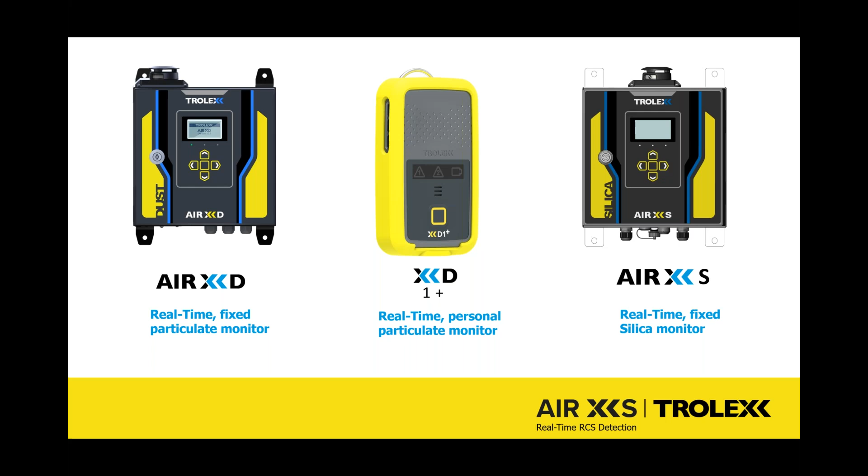So its basic design principle is to give real-time, instantaneous information. So whereas air sampling can be done for legislative purposes, this can give additional information so you can act upon that straight away. We can have short time periods, like from a minute. So if you were looking at a process and you really wanted to drill down into what was causing the peak of that dust, you can have the rolling average on a minute, so you can see the real live data.

We've been doing quite a lot of focus on kitchen worktop manufacturing, kitchen countertop, benchtop, depending on the local name for them. And in fact, Dawn was out last week with our hygienist at a site, and they were looking at doing some different types of cuts and how much dust they generated using different saws. And having the data available on that 1 minute period could really help with how they utilize them, how the extraction was working, and also then to look at how to improve the extraction to give greater protection.

We can also do 15 minutes, 1 hour, 4 hour, or 8 hours, so you can look at a typical operator's rolling average throughout the day. The unit can display the warnings on the device, so you can set, for example, 0.05, so the US Silica level, if my memory is correct. Or you can do it at half that, you can do it at a fifth that. The unit's very, very sensitive, so you can set the alarms of what it can do.

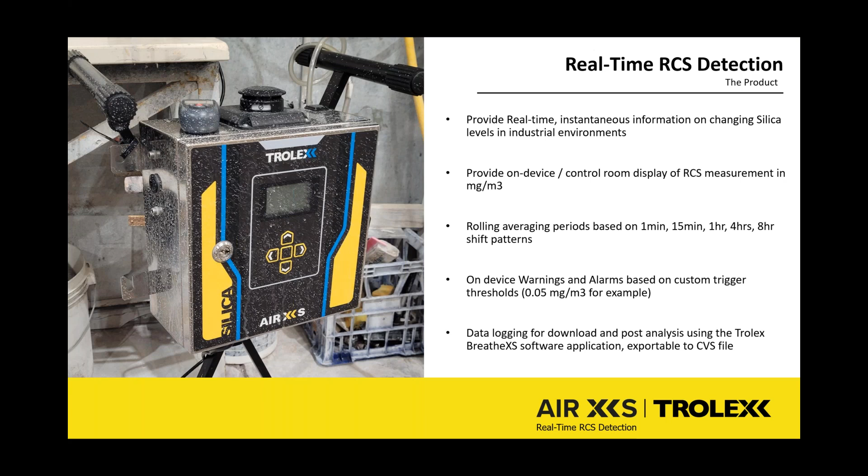So how does it work? So if you think of the top of the unit, that's what the unit looks like. So it's about a foot square, its footprint on there. So the air goes through from the top into the laser, and this is a sensor here. So let's just see if I can share my webcam, 1 second.

So this is a typical sensor in our small portable monitors. This counts dust by size. So that's the sort of scale of it, just so you can see next to my iPhone. I'm going the wrong way. There we are. Can't work in reverse.

So if we then look at the size of the sensor in the AirXS, this is the size of the sensor. So there's a lot more going on with it compared to a normal particulate monitor, and there's a lot more workings on here. You can see these steel rods holding all the different lenses in pure alignment, and a lot more processing power going on with the unit. This is what makes it a lot different.

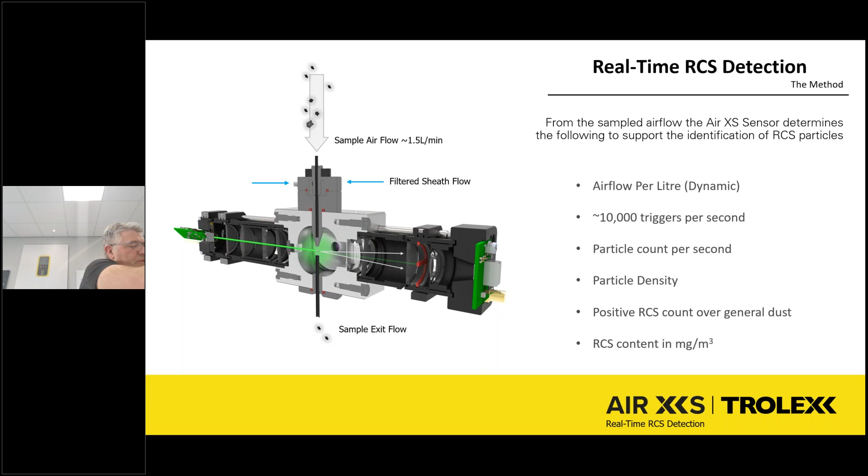So going back to the schematic here, the air is going to come through the top. We have a filtered sheath flow, which I'll come on to in a minute. It then goes in to be analyzed by the laser. So we've got a very, very focused point, and then we're looking at different readings coming off of this. And I'll go through that in a second. You see there, it can do 10,000 triggers per second.

So if you think of a heavy dust environment, whether this be construction where somebody's cutting some concrete with a saw, we've all probably driven past roadwork contractors where they have the Stihl saws brand in the UK, but it's just a concrete cutting saw. Typically they have no protection, and they're doing a grimace as they cut away, and they're covered in a cloud of dust. So when you think about the AirXS monitor, this can cope with 10,000 counts per second. So it's going to give you lots of information.

So it's looking at particle count. We know the density of respirable crystalline silica. It can ignore the generic dust, and it's just going to focus on the respirable crystalline silica dust. And then the data it's going to push out at the end is going to be the respirable crystalline silica content in milligrams per meter cubed. So we can see that for comparison between occupational levels, comparison to what the level is typically, comparison to what the level is that you're aiming for as a business or as a hygienist working within a business.

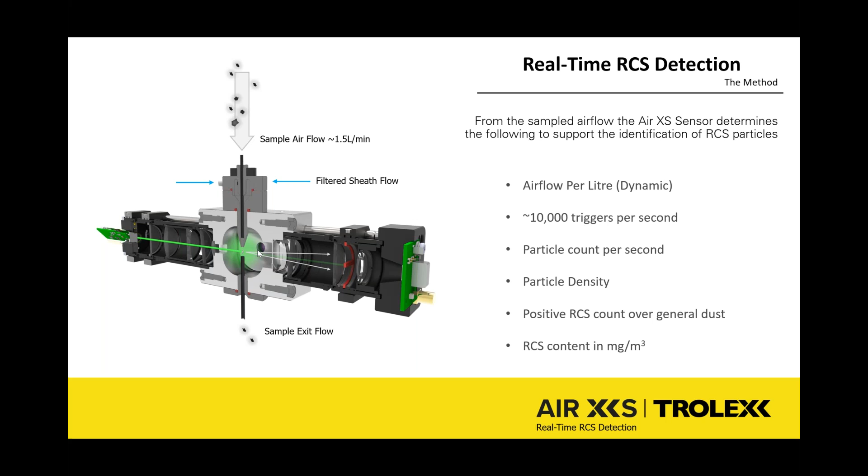So the air is going to come through and out there. You can see there's a filter here. We have one filter and another one just to the side. I'll show you a unit towards the end of the presentation. One filter is cleaning the air before it goes into the pump. We do this because dust particles inside a pump will cause damage and give it a short life.

And then the second filter, once we've counted the air, any particulate contamination is captured on that filter. So we're not counting any dangerous respirable crystalline silica in our monitor and allowing it to go back into the air to be breathed in. We actually capture it in the filter as well.

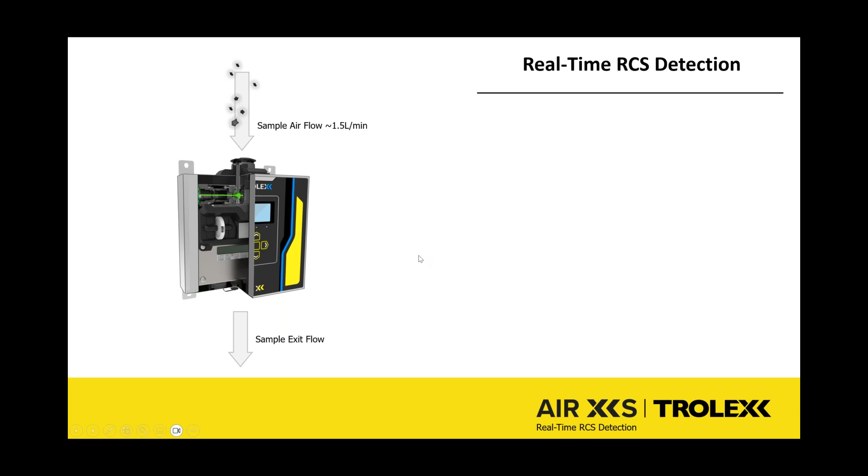So we're not allowing that particular bit of the air to go and harm somebody's lungs. So this is how it works.

If you think of what I said about our standard small particulate monitor, that would normally just have a light source and a receiver. What we're doing with the AirXS sensor, we're looking at counting the particles by size. We know the density, but then we're going to use something called optical refraction. So what you can see around here, this is very different to any other particle counter. Respirable crystalline silica has a signature pattern.

And by looking at the light refraction from it, measuring the light absorption, we then couple that with a particle size and the wavelength of what we send the laser out, we can calculate with these signatures the respirable crystalline silica content in milligrams meter cubed. If you remember what I said before, it can do 10,000 counts per second. So when you're thinking how much dust is out there and the dangerous dust we can't see, it can cope with a lot of dust, and it can do it very, very quickly.

So put that simply, the box on the left is the total air that goes through the sensor. We know it in litres because we know the size of our chamber. We know the flow rate of the pump. We then count the particles, but then we're looking at the silica content, and this is what we're going to report on in milligrams meter cubed.

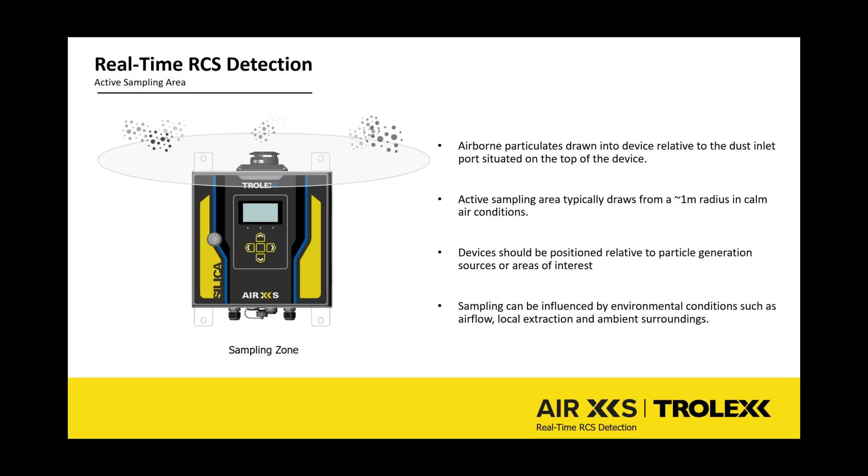When we're looking at level of detection, it can go down to 1 micron size, and its smallest mass is 1 microgram. So it can be very, very precise in the data and the low level it can report on. Continuous loading, it can cope with 25 milligrams meter cubed all day long, every day. And if you're aware of dust loadings and dust levels, 25 milligrams meter cubed is a lot of dust.

It can also cope with max dust loads of 150 milligrams. So if we're thinking of maybe a quarry next to a crushing plant, if the filters aren't working, the screening's not working, the extraction's not working, or even on a quarry when possibly doing an explosion to release more rock. So it can cope with very, very high levels of dust.

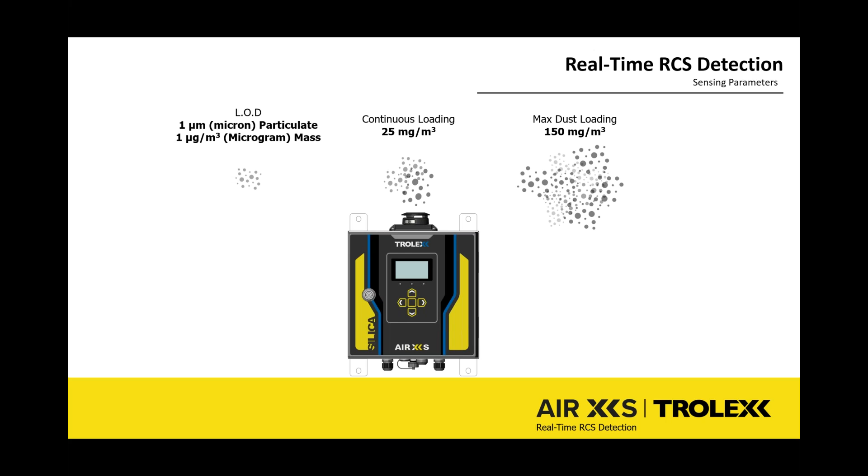So say if it's a new construction site and you always wanted to do some boundary monitoring, you've got some vehicles creating the road in there, but there may be some residents nearby who are warning of dust issues, or there's a risk of silica from the rock content. You can move this around the site and have information on there.

We've got a 4G unit coming out very soon, or you can download the data at the end of the day, end of the week, onto a USB stick from this little screw cap here, the USB port. So you can take the data out and put it in our software and analyze that. And the data is also displayed on the screen, which I'll show you on a separate slide.

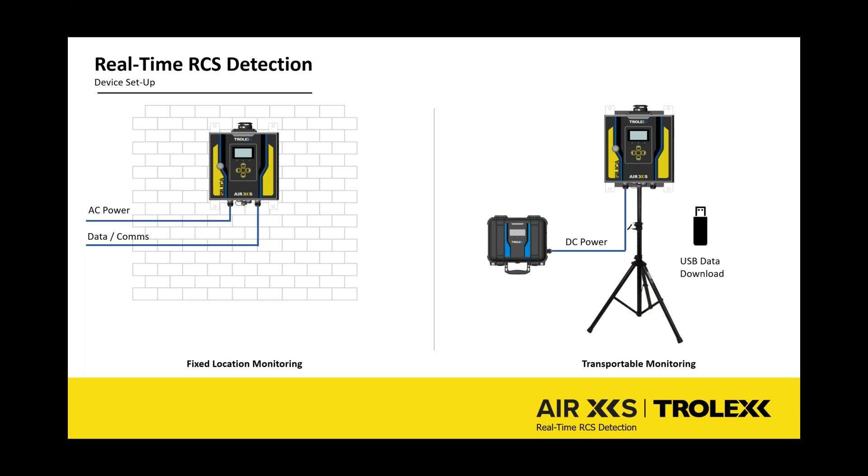So the units are easy to start up. So once power is applied, it goes into its startup screen. Probably takes about 30 seconds to run the warm up and the self-test procedure, and then it goes straight into monitoring. On this one, where it's displaying 15 minutes, you'd have to have the unit running for 15 minutes to see that data. If I was to press the left arrow, it would then say 1 minute, and if the unit's been running for 1 minute, it would show that data.

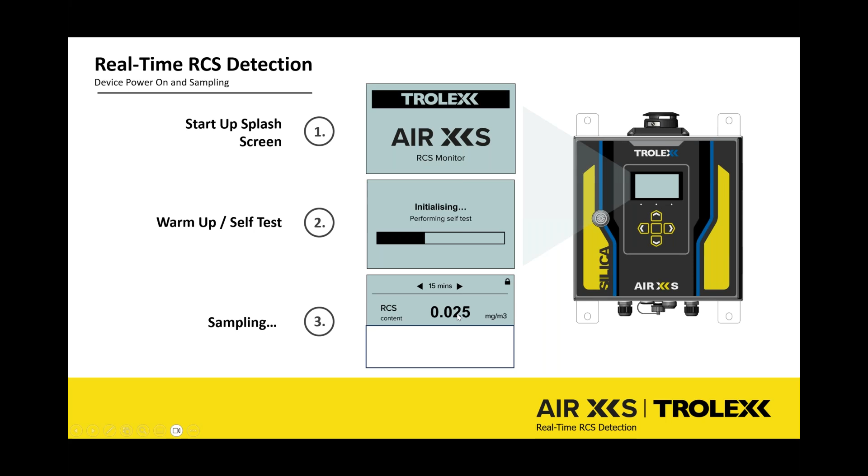If I press the right arrow, it'd go 1 minute, 15 minutes, 1 hour, 4 hours, 8 hours, but it has to see that amount of time to report on that. It won't guess what it's seen, so it's not an analyzer, it's a monitor. It's going to report on actual data it's seen and report that on the screen and also the software. So again, this one here, bit of a zoom in, so it's running 0.04 milligrams per meter cubed on a rolling 15-minute average.

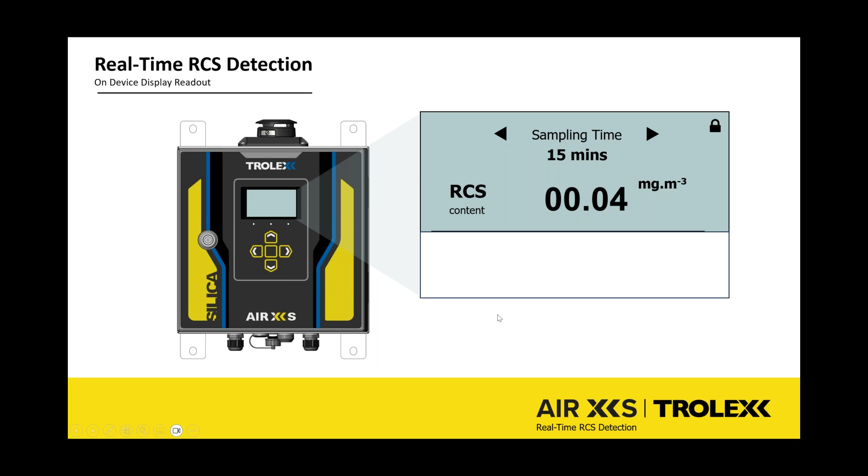What we can also do on here, the alarms can be set, so you can either go for the local legislative alarm, you can go for a company alarm. I know some major companies go for half the local level, or you go for a bespoke one you want to set as a hygienist, go to much lower levels. So it's got 2 alarms here. So for this one here, as an example, it's been set at a rolling 15 minute and the value is 0.05. So the unit, if the alarm's breached, will go red. We can have an external audio visual alarm sited here, or we can connect it into a factory system, which I'll show you soon.

As well as being able to have those alarms, the monitor's also got 2 4-to-20 milliamp outputs. What that means is you can connect other equipment to it. You can connect switchgear to it. So if I think of my crushing plant at an aggregate location, if my alarm is breached, it can then turn on a secondary extraction unit, or it can turn on a water suppression unit, or it could even trip a switch to turn off the machine that's generating the dust. So as well as being able to give you the data, the unit can actually be set up to be active in controlling other controls.

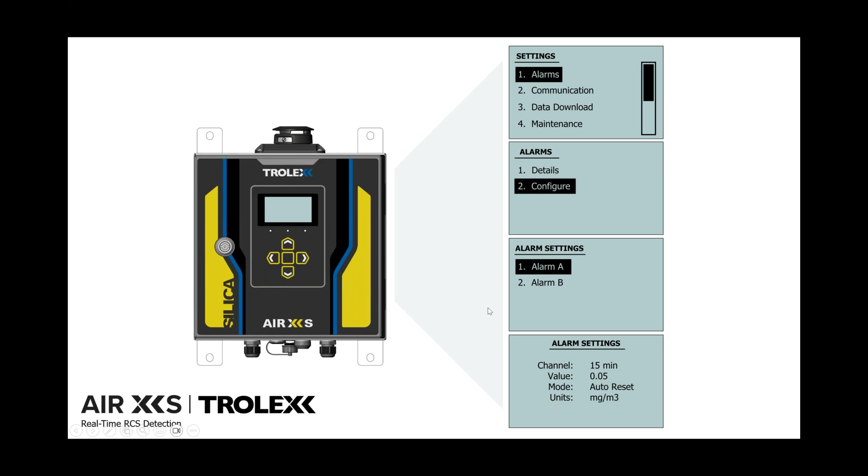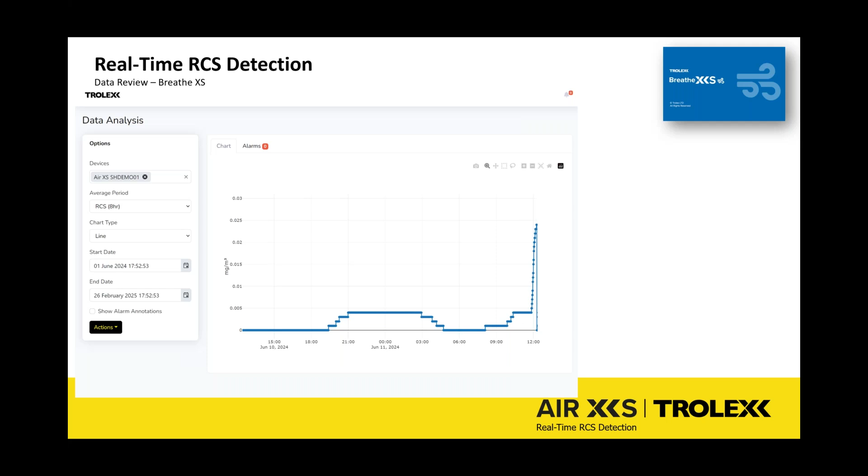This was another application where the hygienist reported dust levels on conveyor belts, quite a common practice, where the material's traveling down a conveyor belt, and the hygienist had noticed that when the product was hitting the roller, they were seeing a spike in dust that was bouncing along. So engineering got some budget. They changed the rollers to a softer material, so as a product hit it, it didn't have such an impact, and so the dust level was lower.

And again, it's a simple way of getting very quick readings to get the data to be able to say, yes, this has lowered the exposure level, and we can look at ways of keeping workers safe. Okay, and there's probably some housekeeping that needs to be improved in this one as well.

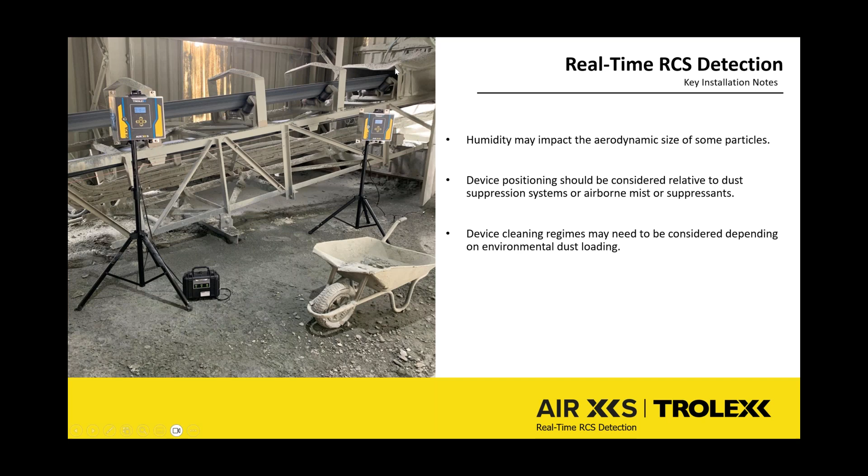This is an example of a factory. So this is a factory in Spain. They do have sites in the US as well, but this is one very recent from last year. So they've got real-time monitors, the dust monitors. Remember I said about these 4 to 20 milliamp outputs giving data. So this is wired up to this traffic light system.

So as an employee is going around a factory where there are known dust exposure hazards, they can see that this area is safe. Then if you look over here in the control room, there's lots of cameras and displays for the control room operator. He or she can then see the exact levels in different areas of the plant, the dust readings. Then over here, we've got like an alarm panel. So we've got 5 areas that are operating safe, green lights.

Then we've got one area that's operating, and that's known as area 27 on this example. So maintenance can go and look. The green light would have turned red on area 27, so this one outside would have turned red. The employees would know to leave that area. It's an audio visual alarm as well, so not just a light, it does beep at 85 decibels to tell any workers in the area to remove themselves from that. Then maintenance and engineering can come and look at what's happened in this area.

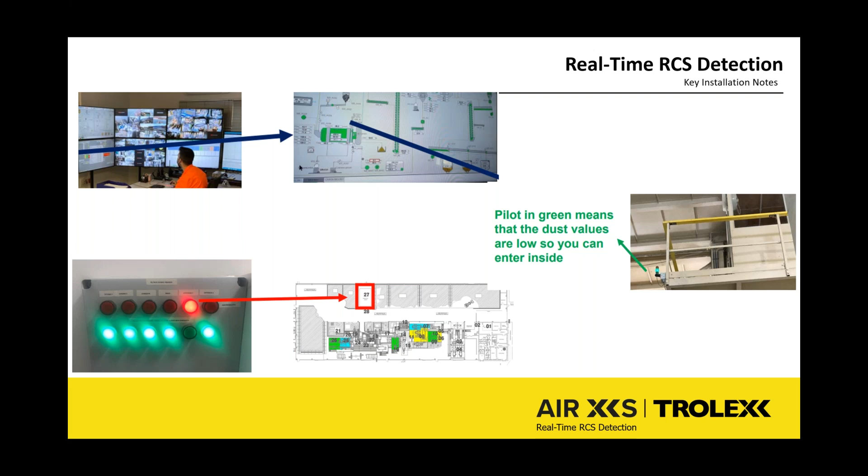Some of the questions that were asked before the webinar were about test standards. There aren't any standards around the world for real-time dust monitors. So we've done lots and lots of tests ourselves, but people often asked if we had some third-party testing undertaken. So last year we had Bureau Veritas come in. Bureau Veritas are probably the world's biggest or most well-known occupational hygiene provider, in my opinion. Maybe somebody else thinks something different. So they came in.

This is our test cube in our lab. So it's a meter square, which helps with measuring particulate milligram per meter. So they set up 3 different test pumps, as you can see, left, right, on the right wall. The Air XS is mounted in the middle. And they ran 8-hour testing of all the pumped units and the Air XS. It's a sealed chamber. Dust is fed in from the top. I've got a short video to show that in a moment or two to show you how we do that.

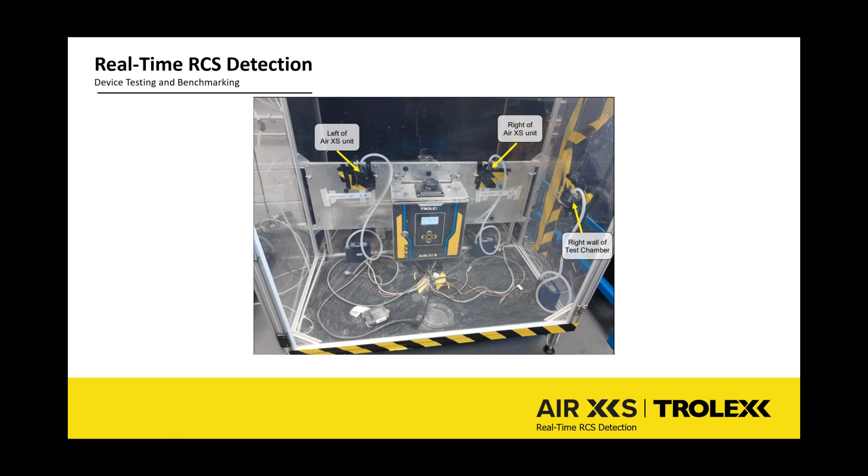So this was based at looking, we knew 30 milligram would develop readings around 0.05, so looking at exposure levels for the US, Australia, and other countries at that level.

We're reporting slightly over. We quote a plus or minus 25% accuracy from continuous testing, and that falls within our accuracy figure for that. We have Bureau Veritas in again testing this month. They're doing 2 lots of testing this month, 2 lots of testing next month, and we're going to keep repeating that and getting more data so we can share more information on there.

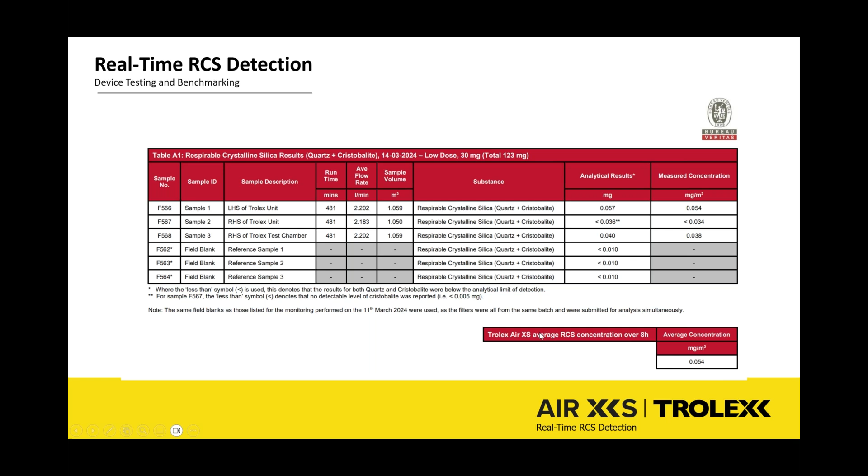Going back to this one here, this was developed around trying to replicate the exposure level for the US and Australia. We can go a lot lower, so I was on a call with New Zealand and their level is 0.025, but as some of you know, that can go below the limit of detection for air sampling. So we've tried to be fair and tested on figures that air sampling and real-time monitoring can both work in the same area. Again, I will share these, so if there are any questions, you'll get to read them in full detail.

We had a couple of new appointments last year. In September, Fahim joined us. She has a doctorate in soil erosion analysis, so she's leading our lab management and testing, with the help of Joe, who joined us in October. Joe's an occupational hygienist, 15 years.

So Fahim and Joe are going to write a white paper. And part of that is we're going to do lots more lab testing. We'll continue to do our own lab testing, with Bureau Veritas coming in. But also we're sending Joe out into the workplace. So as you hygienists know, typical setup, a Peli case for the pumps, sampling heads, going out into different workplaces, doing side-by-side monitoring with our personal monitor, sampling head, and also within the workplace the Air XS.

And yes, I know this is area sampling and not personal sampling, but we're trying to give indicative information of what they're seeing so we can give a greater picture of how they work alongside each other. What do they look like? And so we're getting a balance of different data from our lab, which is a test cube, which is very, very controlled, to normal working environments.

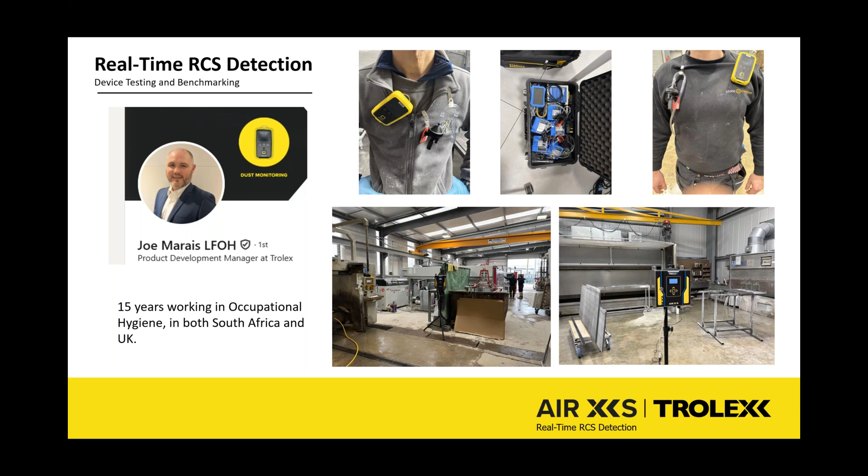And this is what we're seeing with the real-time monitoring, from something personal like the XD1 Plus, which will beep, flash, and vibrate if an alarm is breached. This one is non-dust specific, so it won't tell you what the dust is. It will just tell you that the level has been breached. As you remember back to that sensor size, we need a lot more power and size with the Air XS sensor to make it able to do its calculations and analysis.

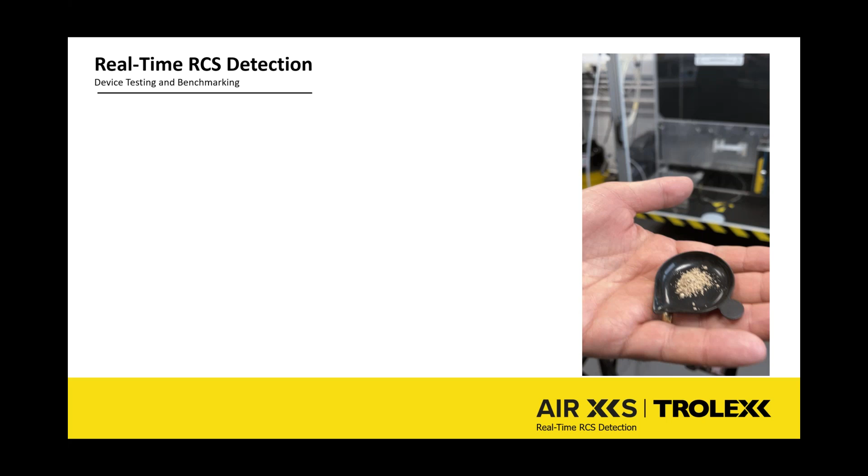What we have here is a video. This is Fahim doing our testing in a lab. So we have some dust sample going in. I apologize, this screen's a bit small. I will share a link to these videos for you.

Then we've got a compressor just down here on the left. Fahim will connect the compressor, and then you'll look for a dispersal here of the dust. I don't know how easy that was to see. So when a compressor goes in to disperse the dust into the monitoring chamber, I'll do that again. I will share a link to this or get it up on our company YouTube so you can see this in a bit better detail.

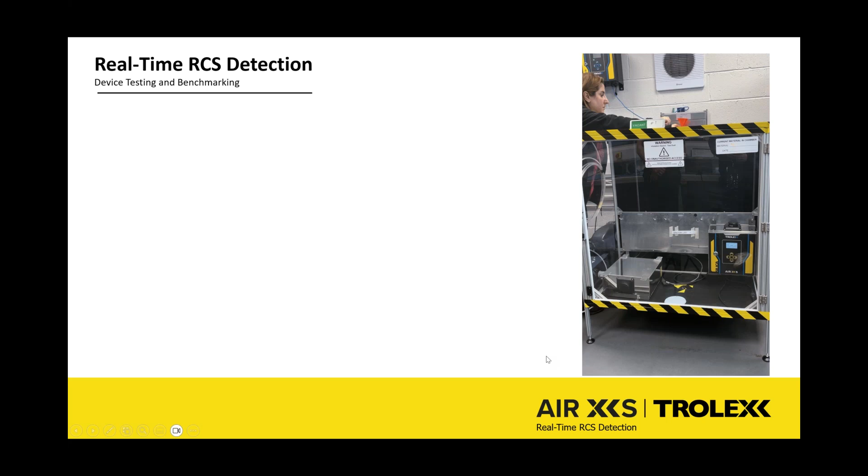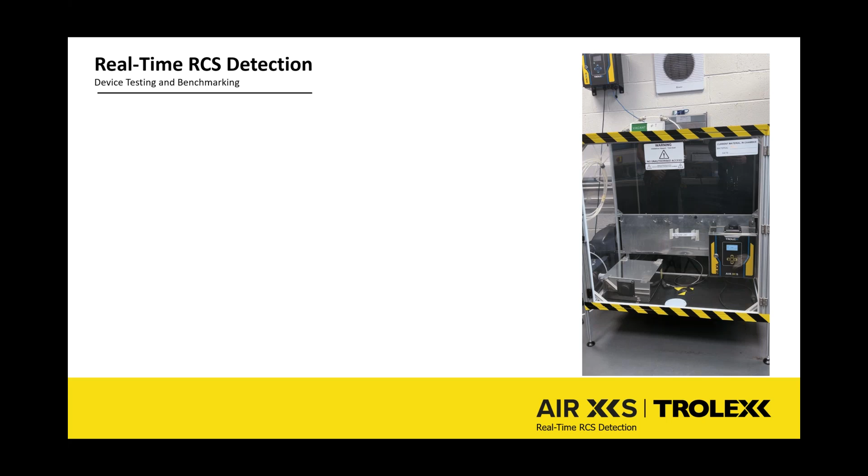If you focus around here, hopefully you can see that, but like I said, I will share that. At the same time, we had one camera looking at an overview of the chamber, and we had a second camera pointing directly on here. And again, sorry, these are too small to see very well, but it's currently showing 0.000 milligram per meter cubed. And we hear the sample going in as we flick through. So we're now at 0.920 milligram per meter cubed on a rolling 1 minute average.

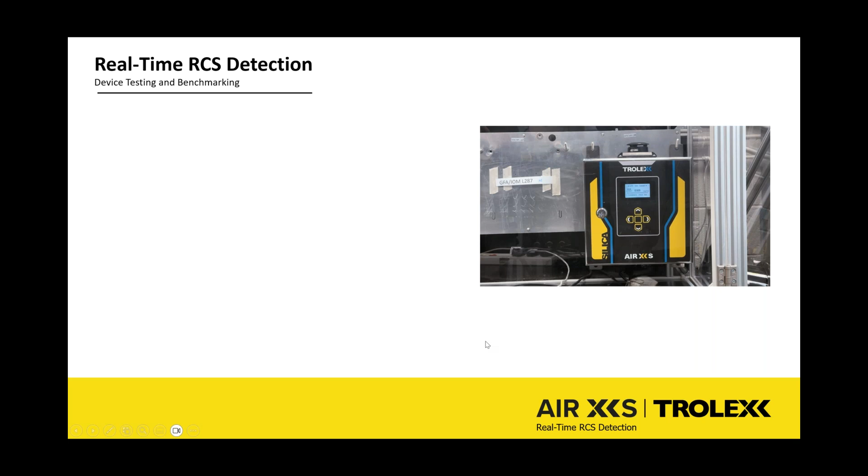And then that's going to go, so you can see the data really, really quickly. And now it'll change up to 1.3. But I will share these so they're easy to see.

So we came and gave them an overview. As we're a Manchester company, we'll loan them a unit they can use to educate the next generation of students coming through, so we can get that next stage of technology involved in part of the curriculum, and so they can be aware of what's going on and be kept up to date with developments of what's out there.

That's the end of the presentation. What I'm going to do now is share my webcam. There were a couple of questions beforehand about testing, so we're just going to go for a little walk. 1 second, if I can do this properly without dropping you. So the monitor's there.

So somebody put in one of the questions, what maintenance or testing does a unit need? So every month it needs a compliance test. So we have these bottles of sample dust. So within these, we have some small bottles. Then you would tip that into an aspirator. Inside there, you'd violently shake this, give it a good bang.

There we can see it showing the live reading, 1 minute sample, the 15 minute, the 1 hour, the 4 hour. It's not been run for 8 hours, so it won't give me that information. I had this on this morning when I came to the office, so it's only going to show me that data.

I'm very pleased to see we don't have a respirable crystalline silica issue in the office, but you can see how low it can go, 0.00 milligrams. So it can give you very, very precise data on what the area or the workers are being exposed to. And you can look at your controls, making sure they're adequate and suitable, or whether there's been environmental change, different wind direction. Maybe there's been a fire nearby and the fire brigade are taking all the water pressure.

So your water suppression, you are getting some water pressure, but it maybe dropped from 2 bar to half a bar. And the control you had in place maybe isn't working as adequately as was thought. So things like that it can really help with. So I hope that helps with some of the questions that were asked before.

Adrian, we've got a couple others, if you don't mind, really quickly. One that came up is intrinsic safety rating. It's not intrinsically safe. The temperature that the laser operates at wouldn't pass intrinsically safe rating, no. Okay. It's a general purpose unit. Next one is, I'm assuming this would give you milligrams per meter cubed. Yes, for all forms of silica present as total RCS count, not specific forms of silica. No, it won't identify the difference between them. It's just going to report total RCS.

Does the wearable monitor measure respirable dust, total, or both? The wearable monitor reports on PM1, PM2.5, PM4, and PM10. So it's reporting on respirable and the lower end of inhalable. I know inhalable can go up to PM100, but it's good at respirable and it'll touch slightly into inhalable.